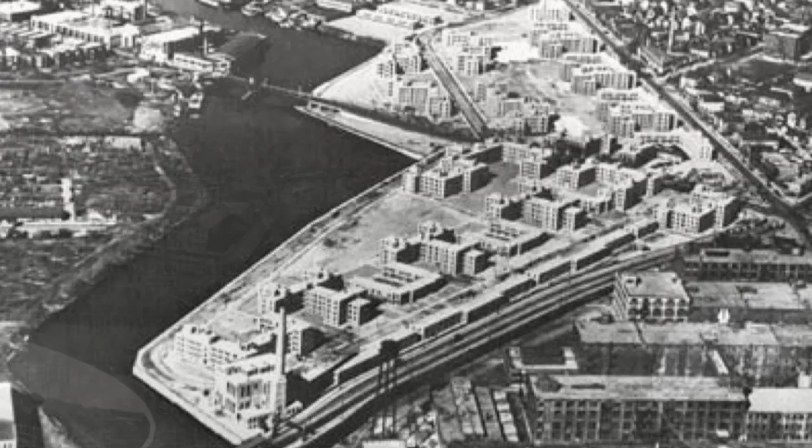Lathrop Community Partners is excited to present Greenscapes, a concept designed to provide the greatest community benefits over a long horizon of time. 75 years ago, the land where Lathrop now stands was used by industry, but as those industries declined, the land was cleared to make way for new housing. In that same spirit, the Greenscapes concept illustrates a wholesale redevelopment of the 32-acre site.

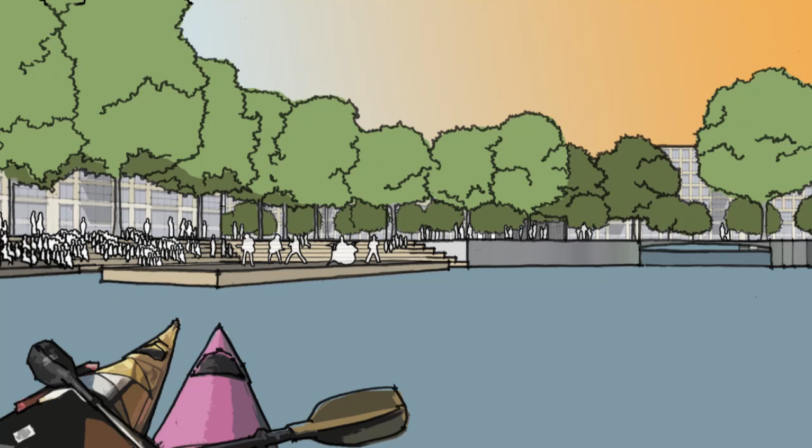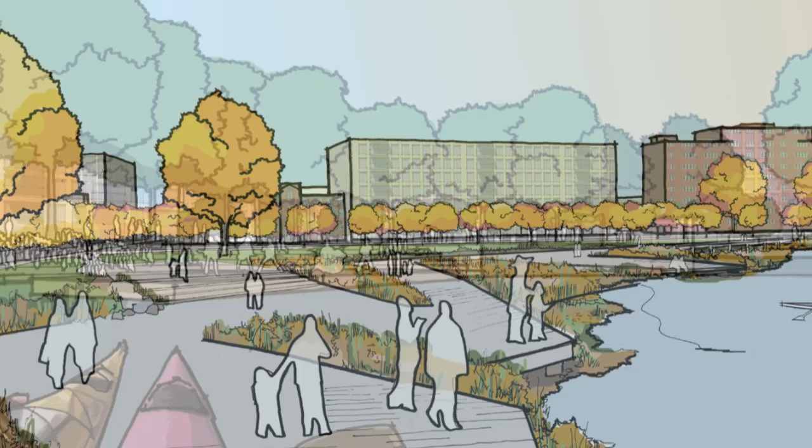When Jensen planned Lathrop in the 1930s, the Chicago River was an open sewer. In response, he wisely located the Great Lawn inland, buffered from the river. Inspired by the broader plan now underway to clean the river's water, the Greenscapes concept takes advantage of a design opportunity that did not exist in Jensen's time: recreational uses of the river.

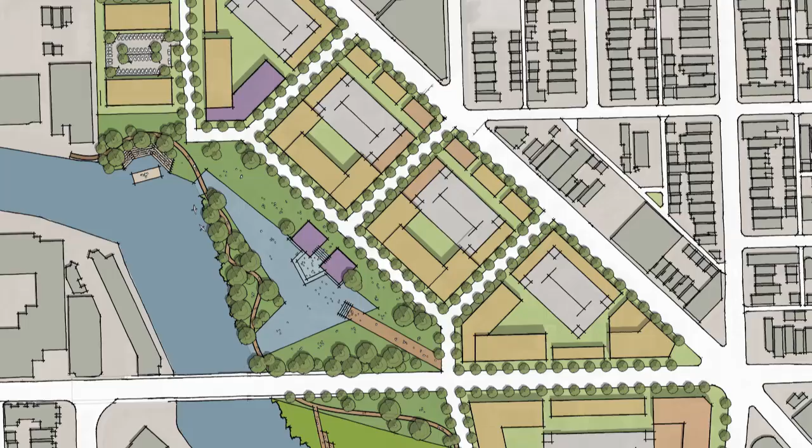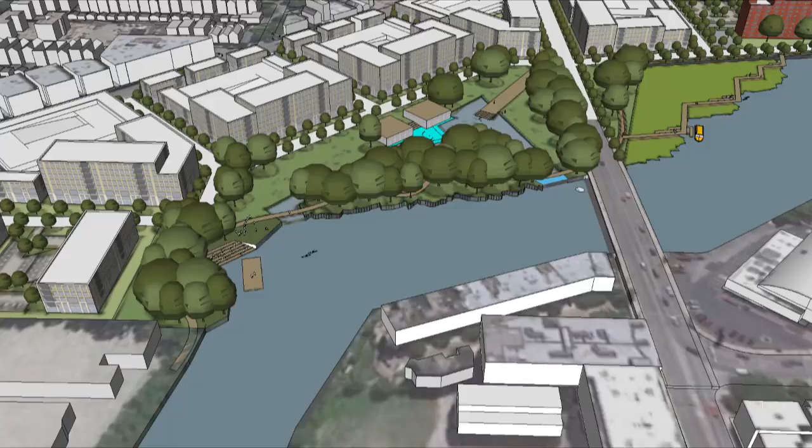On the north side of the city, river access and riverside parks are rare. In order to provide the larger community recreational access to the newly clean water of the Chicago River, the Greenscapes concept proposes a new 5-acre waterside park north of Diversey, the defining feature that gives the Greenscapes concept its name. This park, located in an elbow of the river, could offer unique amenities and create a vibrant neighborhood destination year-round.

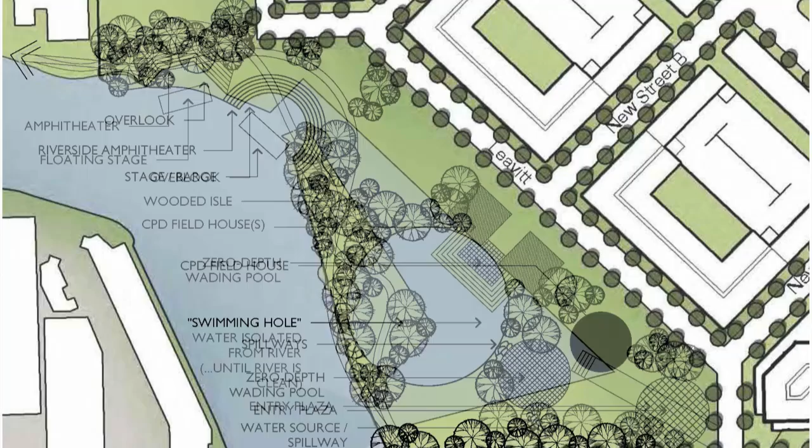While there are many different ways to achieve this vision, some shared opportunities stand out: an island, a swimming hole, a skating pond, a field house, community gardens, a boat launch, an enhanced bike trail, and streets that end in views of the river, just to name a few.

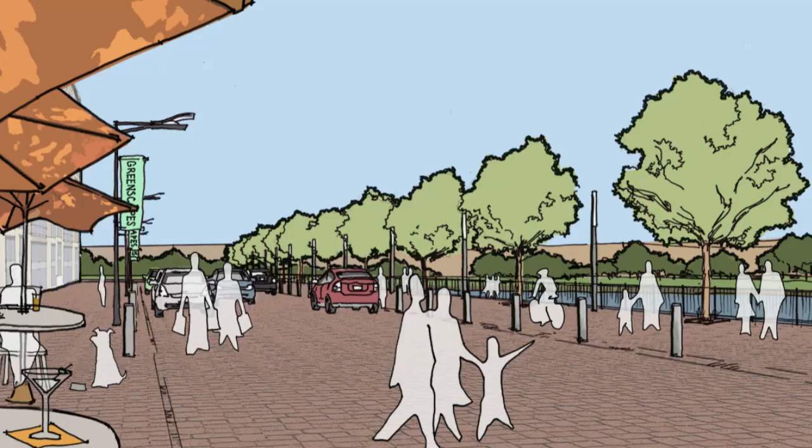Public river edge access would continue south of Diversey in the form of an esplanade, a river edge open space specially designed for walking, but that also accommodates bicycles and low-speed vehicles. In other cities in the U.S. and abroad, these multi-use esplanades are destinations, a place to walk, dine, or simply pass the time.

North of Diversey Parkway, Jens Jensen's plan for Lathrop consisted of a single superblock, roughly equal in size to 4 Chicago blocks, a development pattern foreign to Chicago neighborhoods that contributes to Lathrop's limited physical connections and isolation. In order to promote connectivity and weave Lathrop into the surrounding neighborhood fabric, the Greenscapes concept proposes to replace this superblock with traditional Chicago-sized blocks.

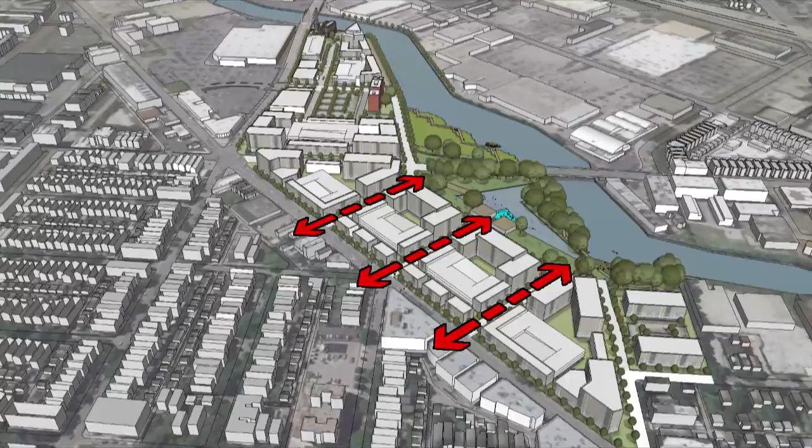3 new streets would provide seamless connections between the surrounding neighborhoods and the new Riverside Park. The centermost of these 3 new streets could feature ground-floor retail and community uses, creating a neighborhood center along Clybourn Avenue. In the Greenscapes concept, Leavitt Street would be the sole north-south street connection running continuously to the south end of the site, where 2 new east-west streets would connect to Damen Avenue.

With the introduction of a new street network and the addition of CTA bus stops along Diversey, a water taxi stop on Leavitt, the Greenscapes site plan concept highlights the opportunities to make the site a walkable Chicago neighborhood.

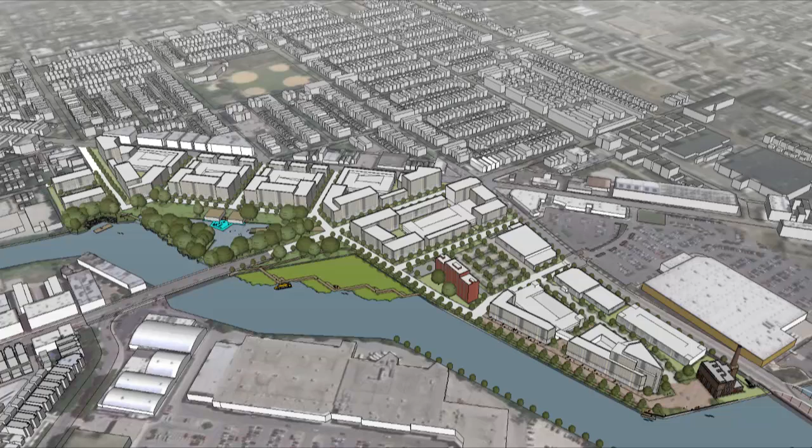Another distinctive feature of the Greenscapes concept is that it proposes no buildings taller than Lathrop Elderly, the existing CHA senior building. This mid-rise approach requires that more land be built on, including the Great Lawn and the very wide side yards between buildings, but does not introduce any high-rise development.

As previously mentioned, the Greenscapes concept adds 2 new east-west streets south of Diversey, defining 3 new city blocks well-sized for urban mixed-use developments. These new streets will provide multiple alternate routes around the Diversey-Damen-Clybourn intersection.

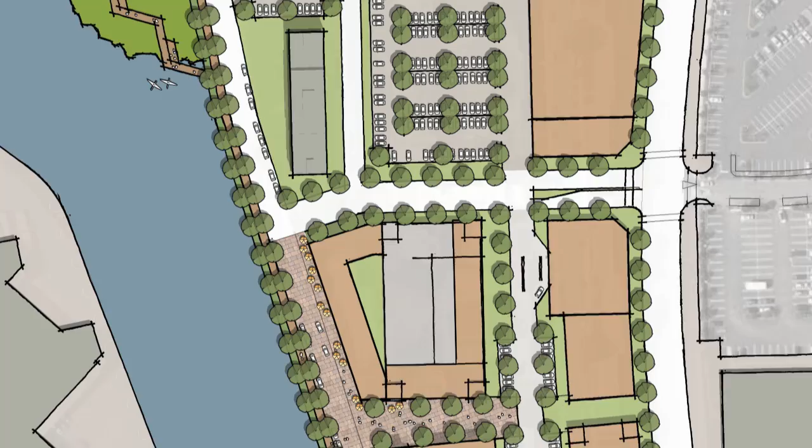Schubert Street is the southernmost of these new streets and would align with the existing Costco driveway, an intersection we anticipate would be signalized. Schubert Street west of Damen would provide access to new retail development and would continue west unobstructed to the Esplanade, providing a visual link to the river.

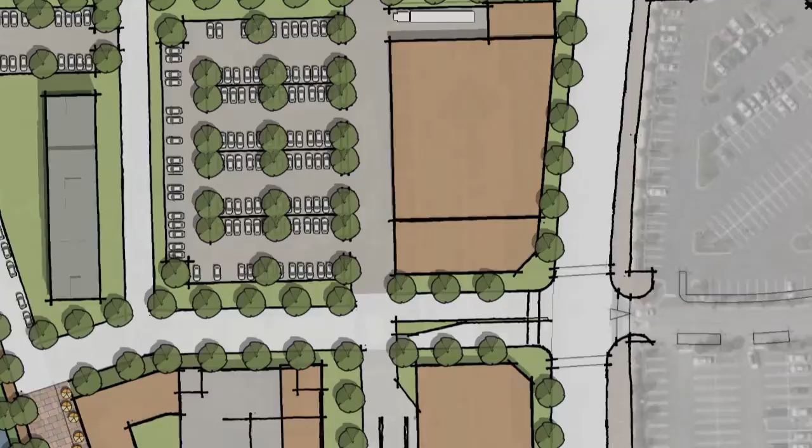The Greenscapes concept proposes a grocery store, a pharmacy, and other small shops in a shopping center format, 1-story buildings with parking in front, backing up to Damen with front doors facing west, a convenient pattern for shoppers who would arrive by car. Outside of a city's downtown district and highly dense neighborhoods, this automobile-oriented retail pattern is a norm across the country. Proposing it here involves trade-offs.

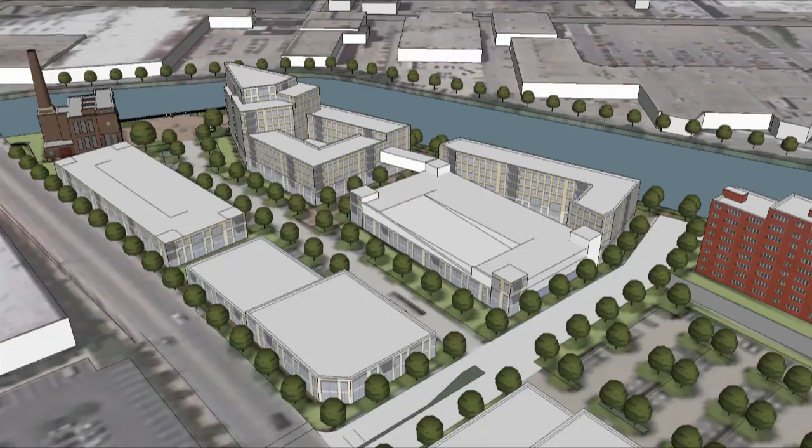While not as pedestrian-friendly as other retail formats, as the standard in the retail industry, the quality and quantity of retail shops would be greatly improved, thereby creating more and better jobs in the near term. The Greenscapes concept prompts a challenge to plan how this proposed auto-oriented retail can evolve into a more pedestrian-friendly pattern.

The Greenscapes concept proposes to recruit an active living-oriented retailer to occupy the powerhouse, and likely an addition to its north. It is not uncommon for buildings such as the power plant located on rivers to be repurposed to become regional centers for bicycling, hiking, canoeing, camping, climbing, and other outdoor activities, unlike anything in Chicago.

Given our rising levels of adult and childhood obesity, a facility of this sort would promote healthy living and employment opportunities, a win-win that would be the pride of the community.

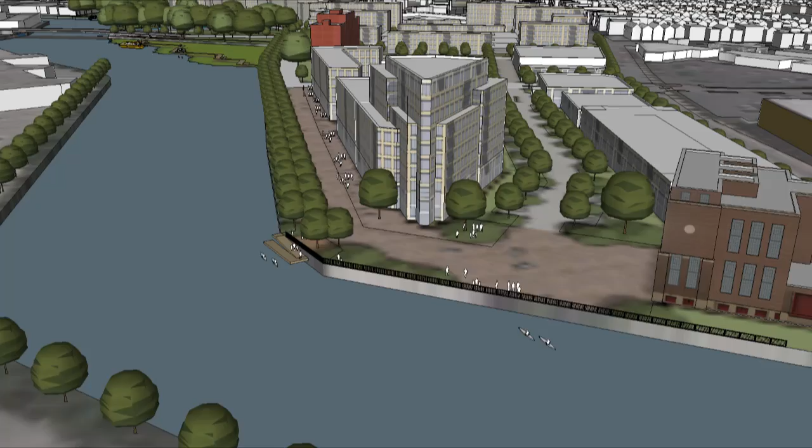The south end of the site features a multi-use plaza designed to promote social interaction and active outdoor living, one of 3 new open spaces along a continuous river walk. This sunny riverside space is shaped by the powerhouse on the east and the base of the residential building on the west.

The plaza would be programmed and would promote very active uses such as exercise classes, bike clinics, kayak launches, and food fairs. The plaza would be the pulsing southern heart of the new Lathrop.

The Greenscapes Concept proposes a visionary leap forward, conceived as a model of a diverse, healthy, safe, and sustainable community. Because the Greenscapes Concept incorporates a Chicago street grid and Chicago-style buildings and blocks, it would be a great neighbor to the Hamlin Park, Logan Square, and surrounding neighborhoods, and an economic, recreational, and environmental asset for the city of Chicago.